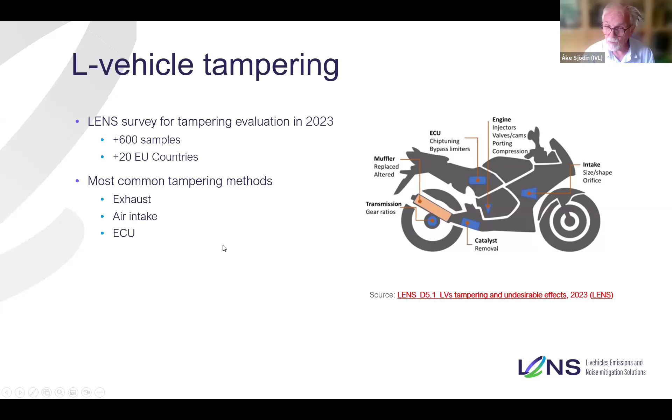A few years ago, one of the first reports coming out of LENS was a survey, a desk work, but also a survey where we interviewed a lot of people, drivers, motorcycle clubs, and so on, to find out a little bit more about how the situation looks in the EU regarding tampering. We had, I think, more than 600 samples and data from 20 EU countries, coming up with some interesting results. This report is available as a public report on the LENS website, so you can download it and read it if you're interested.

So then I will continue with the measurement campaigns that we carried out, give you an overview of that. We did 3 city measurement campaigns last year. We started with measurements in Leuven, in Belgium, in May.

We worked together with the police there, and we did not do so many measurements because they are not so crowded with LVs like in other cities, which I will show you later. But we managed to do emission and noise measurements on about 250 LVs, and as many as 165 of them were inspected at the roadside, pulled over and inspected. Then we continued to the Paris region, in a suburb of Paris, Rueil-Malmaison.

And a scenic site some 50 kilometers outside Paris in September. There we made about 950 measurements on LVs. Regretfully, we did not manage to have any roadside inspections carried out here. This was only due to the fact that this campaign followed very closely on the Olympic Games and the Paralympic Games, which meant that all police resources were working hard July and August, and they had to have their vacation period in September instead. So it was bad timing, but we had no other choice.

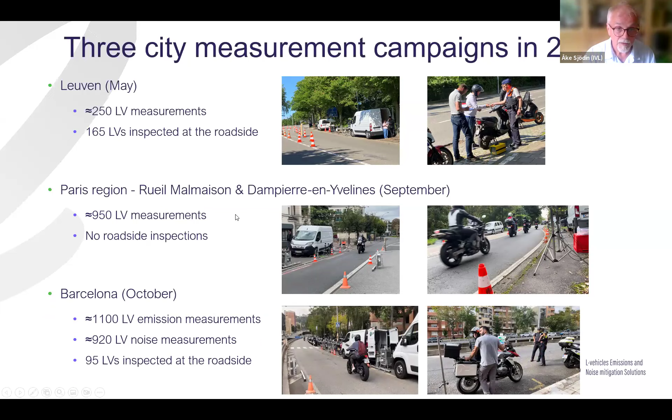I will describe briefly also the instrument that we are using. We have a remote sensing instrument from the Madrid company Opus Remote Sensing Europe, which works by using infrared and UV spectroscopy across the road surface, so we can measure the emissions of gaseous pollutants in the first place, like CO, HC, NOx, and some other gases.

We also measure opacity, PM, speed, acceleration, and it's also connected to an automated license plate reader. So we will get the license plate numbers, and we can find the information on the measured vehicles through the national vehicle registries.

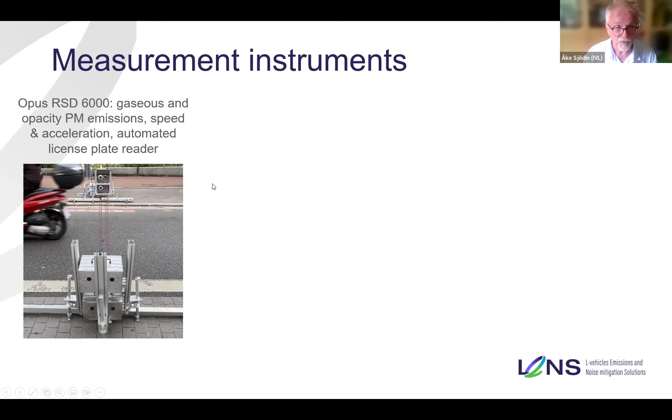Then for the particle measurements, particulate matter emission measurements, we used a bouquet of different instruments. Two of them were developed at the Technical University of Graz in an earlier EU project, and it's been further refined for this project. And we have also used a TSI engine exhaust particle sizer, which is a commercially available instrument for these measurements.

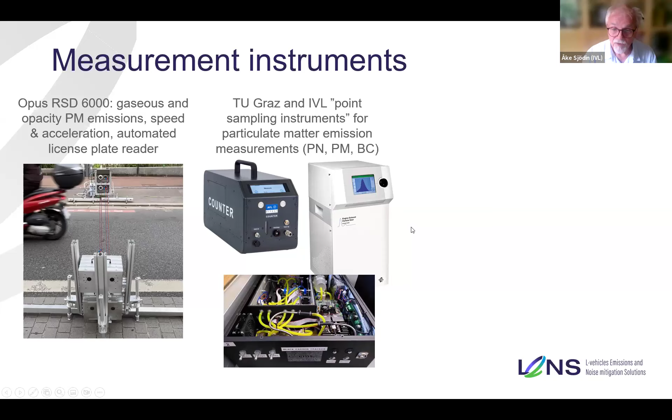Then finally, we had the microphone noise measurement system, an array of 5 microphones that has been developed by KU Leuven, and you will hear more about that in the results section.

Just before I go into some more of the results, I would like to explain to you how this works for the pollutant emission measurements. All the instruments measuring pollutants measure concentrations of pollutants and CO2 in the exhaust plume in the range of 0 to 3 seconds immediately after a vehicle has passed. And the measured concentration ratios of pollutant to CO2 are used to derive instantaneous emission factors in the unit of grams per kilogram fuel burnt, by just deploying the fuel combustion equation and the measured concentration ratios that we have.

And finally, we have used fuel consumption factors corresponding to the driving conditions that we are measuring in these campaigns. They are calculated, and we have used them to derive emission factors in grams per kilometer, which is more understandable, I think, if you compare with emission limits and that stuff.

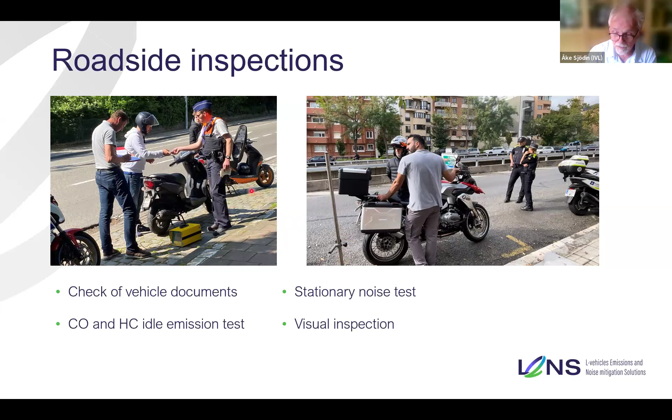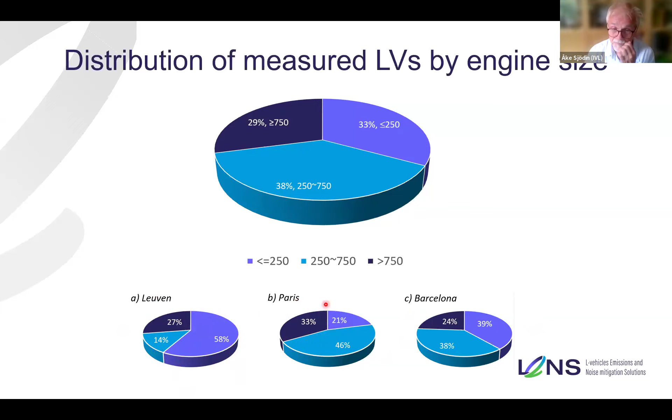Especially Leuven had a very high share of really small mopeds and scooters, whereas in Paris we had more of the heavier ones. Also Barcelona.

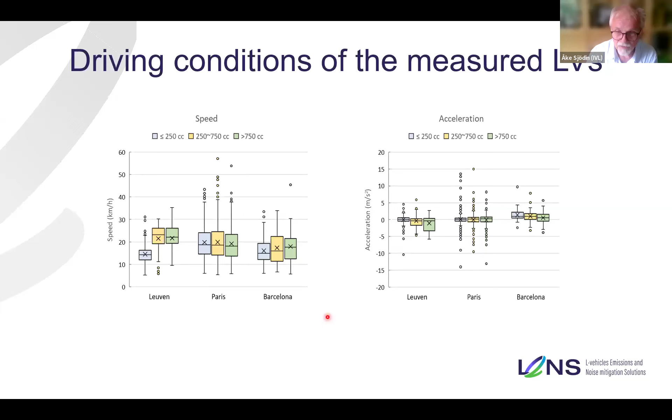Accelerations are quite constant, I would say, but since we measured in an uphill slope at all three sites, we have a positive vehicle-specific power on most vehicles we measure. What might be interesting is that in Barcelona we see a small difference in acceleration from the smallest to the heaviest vehicles. The heavier vehicles tend to decelerate more than the lighter vehicles, which we may see reflected in some of the noise results later on.

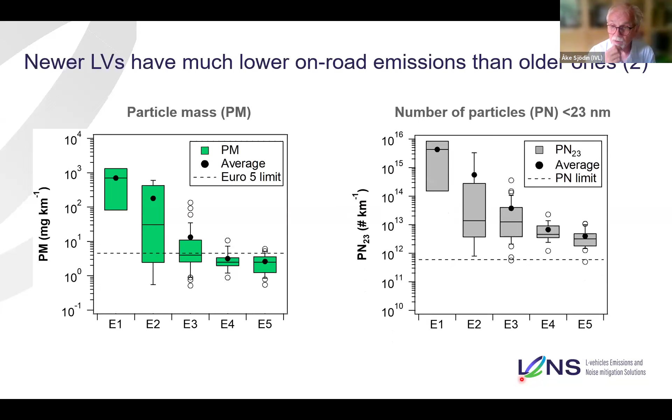If we look at particle number, we don't have any emission limits yet for L vehicles, but we do for Euro 6 cars. It's also a very sharp drop, and the conclusion is that compared to Euro 1 vehicles, the on-road emissions are 2 orders of magnitude lower for PM and 3 orders lower for particle number, the smallest particle number smaller than 23 nanometers. So this is really good evolution, I would say.

Then we tried to analyze the impact of tampered vehicles. In Leuven, based on the roadside inspections, we found that about 11% was modified or tampered in some illegal way. The various tampering approaches are distributed quite equally between those related mainly to noise and those related to emissions, exhaust systems, and mufflers.

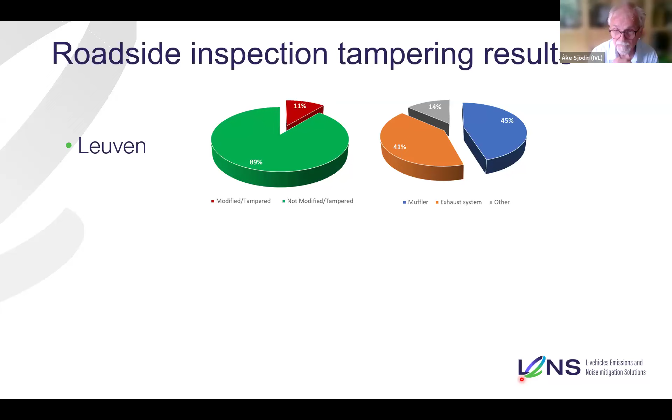Quite interesting is that the results we see in Barcelona agree very well with the results in Leuven. Here we had more advanced testing or inspections at the roadside, so we could differentiate between more tampering or modification methods.

We can see that 33% of the tampered vehicles were above the reference noise level according to the stationary noise test. The exhaust system was modified or tampered in 24% of cases, and no dB killer was present in 24% as well. So there's quite a lot of things that could impact the noise levels.

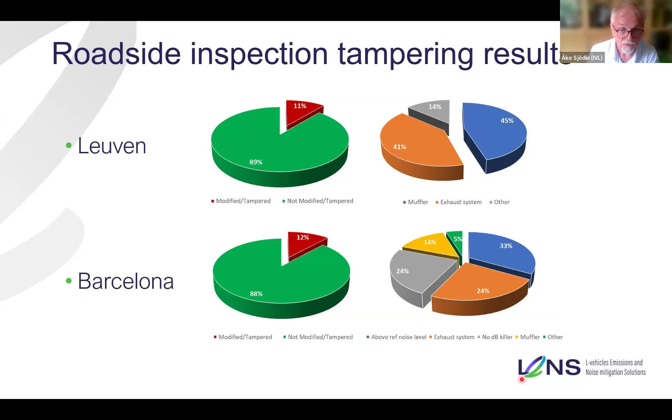How do these kinds of modifications and tampering affect on-road emissions? Quite substantially, although we don't have much data. If you compare the non-modified LVs, which were about 100 in total, with those that were modified or tampered in some way, especially where the exhaust or engine was modified, you see a clear increase for both CO and hydrocarbons.

You also see a similar trend for particulate matter. This is measured with OPUS opacity, UV opacity, so it's not very accurate, but anyway you see a clear difference between the non-modified and the modified ones.

For NOx, on the other hand, you cannot see any difference, or rather the opposite, although the data are very uncertain. And of course if you have that much increase of CO and hydrocarbons, that means these vehicles are running very rich, which will suppress NOx emissions. This could be an impact of that.

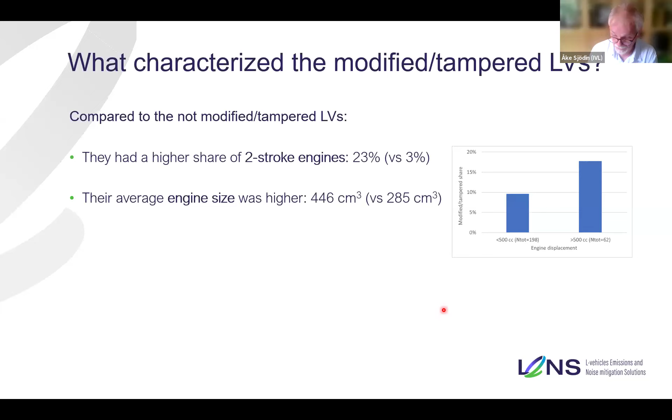You can also see this if you compare the share of modified, tampered vehicles in the two engine size categories: below 500cc and above 500cc. You have a much higher share for the heavier ones. Also, the modified, tampered ones had an average age about 2 years higher than the non-modified ones. However, we did not see any significant differences in average Euro class or average vehicle mileage.

With that, that concludes my presentation. I think there may be time now for some questions.

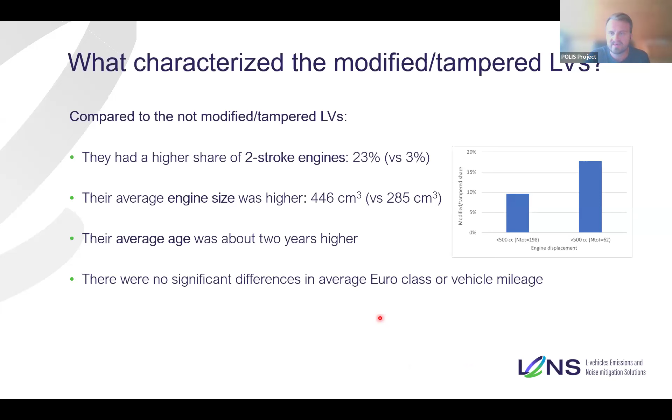Maybe you could go back and share the graphs he's referring to. Was this the right slide? You see the impact? I think he's referring to the tampered vehicles. So yes, that's perfect.

So if you judge by this, it's for CO maybe a factor of 5 or something, for PM maybe a factor of almost 10. CO and hydrocarbons, yeah, so it's quite substantial. Although I must note these are not very many vehicles, so the statistics are a bit uncertain, but it's a significant difference for these vehicles that we compare.

Since I'm not a technical expert, maybe it's a silly question, but how do you assume this could happen? For example, that the PM is so significantly increasing in a tampered vehicle. What are the reasons for this?

Sorry, Niklas, I'm not a very good expert at that either. Okay, maybe just poorly maintained vehicles, or tampered, deliberately tampered in some way.

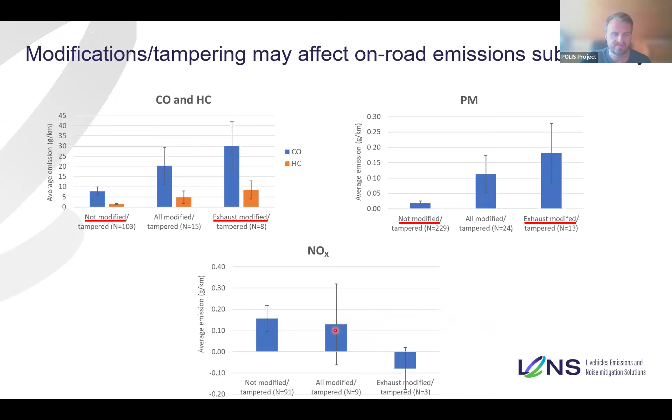Okay, I will then share my screen. And don't forget to enable the audio. I think you have done that, yeah. I think I did, I did. So everyone can hear the sounds. Yeah, perfect, the floor is yours. Are the slides coming through?

Yep. Okay, good morning. So I'm going to guide you through some selected results that we got from the noise measurements along the roadside. So maybe to start, let's have a look at an overview picture.

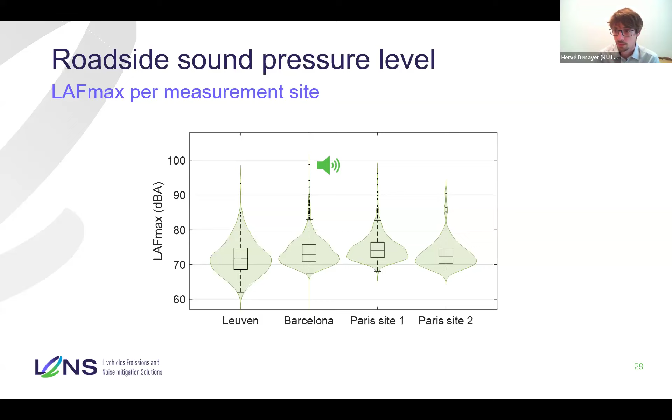For example, I brought the highest level that we measured in Barcelona. I will play it for you. So it's a vehicle that is throttling just in front of the microphones. It's a kind of behavior that is known to lead to much higher levels. So most of these outliers are due to specific behavior that is not linked to the vehicle itself, but mostly to how it's being driven.

First of all, these figures correspond to a mixed fleet, and the composition of that fleet is not uniform at the different sites or within the different categories. Also driving conditions play a very big role in the noise level that we measured, as we already saw before. And the average conditions that vehicles were passing by our measurement site were far from being the most noise critical. Most of them were driving by quite slowly, very often even slowing down to see what was actually happening.

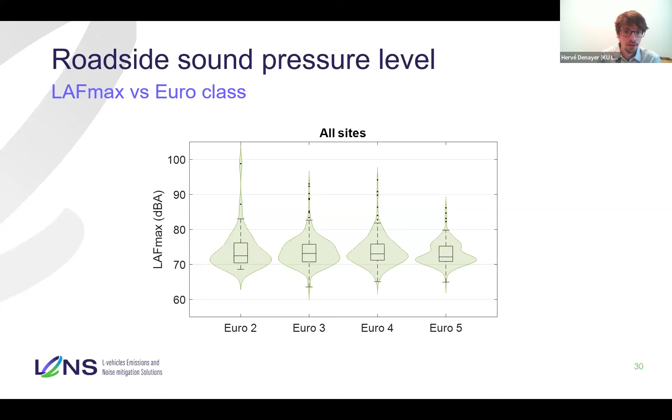The distributions are almost overlapping, which may be surprising at first sight, but it's also kind of logical because of the driving conditions. Speed and acceleration were quite consistent, relatively low among all the categories. But this also means that for the larger vehicles, they are driving by proportionally with a much lower load on their engine than the smaller vehicles.

So in that sense, it shouldn't be too big of a surprise that the levels are not that different. Additionally, also the A-weighting filter plays a role here. Typically noise levels are A-weighted. It's a filter that tries to account for our human perception of sound. It decreases the importance of low frequencies quite significantly compared to higher frequencies. But it's not the only filter that can do this. There are other ones. The A-weighting filter is originally designed for quite low sound pressure levels.

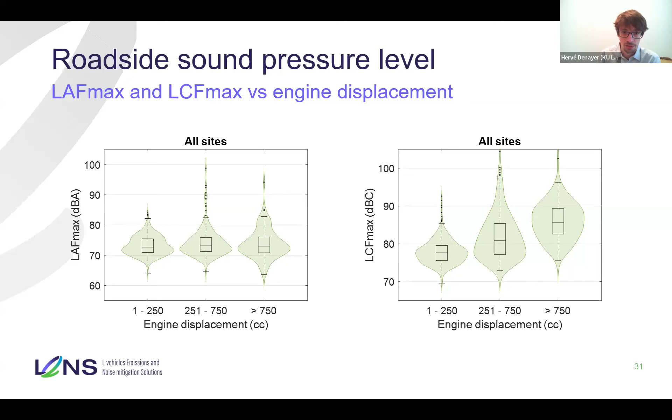This suggests that low frequencies are most likely very important, partially due to driving conditions. People with a tampered motorbike tend to drive more slowly past the measurement site when they see police, but also due to the sound character that people try to achieve with tampering. So those low frequencies play an important role in the sound signature that they're trying to obtain.

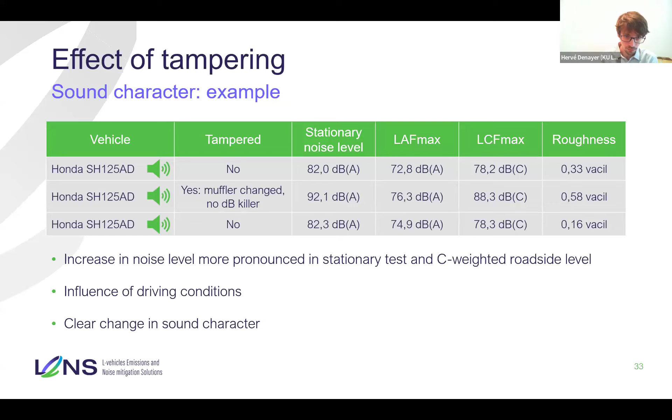There are also metrics that try to quantify certain aspects of that sound character, which we call psychoacoustic metrics, such as roughness, which is in the last column of the table. Roughness is a measure for fast modulation in a signal. It's something very typical for internal combustion engines, where you have a lot of tones that interact with each other, and that leads to these phenomena.

Now, we didn't have any vehicle inspections there, but the site is quite famous, and it's believed that a significant share of vehicles there were tampered with, although we don't have absolute numbers. So we also checked other metrics. I'm not going to go through all of them today, but this is the most striking result.

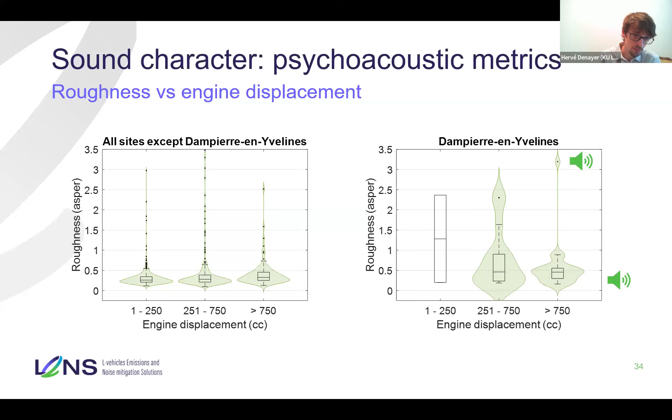There are many other metrics that can be relevant for LV noise, and if we want to capture the full picture, there are definitely many more that we should look at.

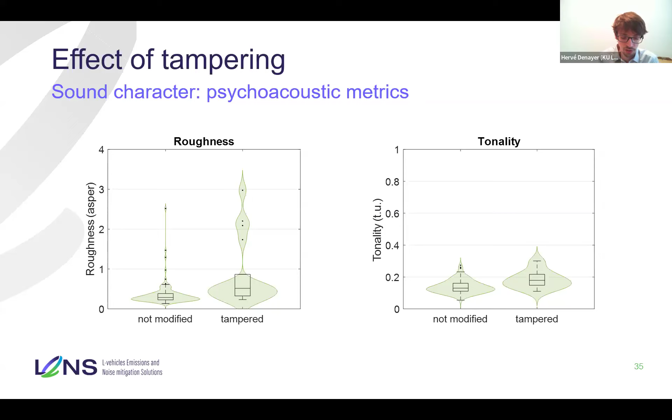What we also did, because if we try to derive a set of indicators for tampering we need much more information, is go beyond the conventional psychoacoustic metrics and look at features from other fields that try to characterize certain attributes of a signal we can link to tampering. For example, kurtosis is a measure for how peaky a signal is. The maximum harmonic product spectrum is a measure for the harmonic content in the low frequency spectrum. We expect these to change when there is tampering.

But there are quite a few conditions that influence these parameters as well, including driving behavior and the character that manufacturers themselves try to give to the sound of their vehicles. So in order to derive a firm set of metrics or an algorithm that can detect tampering, we will need much more data than we currently have available. The data set we currently have doesn't cover the full range of all these parameters that have an influence.

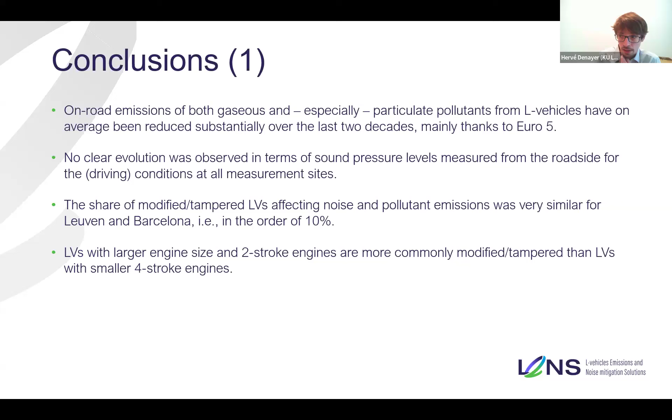If we look at modifications and tampering of mufflers and exhaust systems, they tend to substantially increase the pollutant emissions compared to the non-modified state.

Also, noise levels are often higher for tampered LVs, but it depends how you measure them and how you quantify these levels, how big the resulting difference is.

And then modifications and tampering clearly change the sound character of an LV, often leading to higher roughness and tonality. There are many other metrics that could and should be looked at to indicate tampering, but we don't have sufficient data to give you a firm answer on which set of metrics you should look at to detect a tampered vehicle in the fleet.

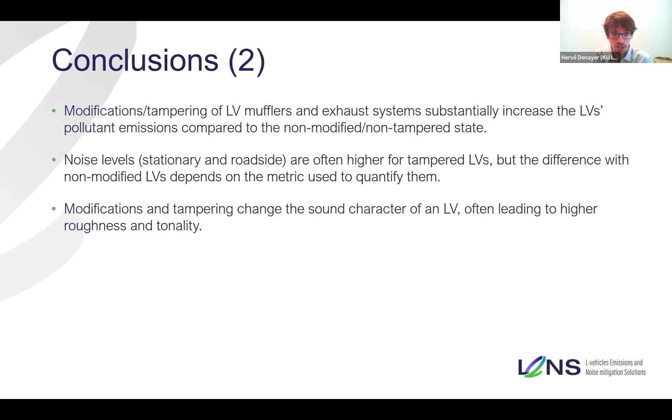And that brings me to the end of my presentation. So thank you for your attention. If there are any questions, I'll be more than happy to try to answer them.

Thank you very much, Hervé. I do not have, and there are no questions in the chat basically, but maybe I can ask you a question. If you would change one thing in your test setup that you have done in the three cities, let's say if you would have more money to spend on better gear, or to have more time to have a more precise setup basically, what would you change? Or is there anything, do you see any shortcomings of the research that you have done basically?

Yeah, so we went in terms of hardware for a low cost solution using mostly available things, in the sense that there are quite some commercial systems available that are specifically designed to isolate the sound of a specific vehicle in road traffic. We didn't want to reproduce all that research or all those efforts ourselves. That's why we used a kind of low cost system.

The main shortcoming that we experienced is the fact that we did not have or did not develop our own ANPR system synchronized with the noise measurements. So everything was done in post-processing, linking to the other measurements, and that has led to quite some loss of data.